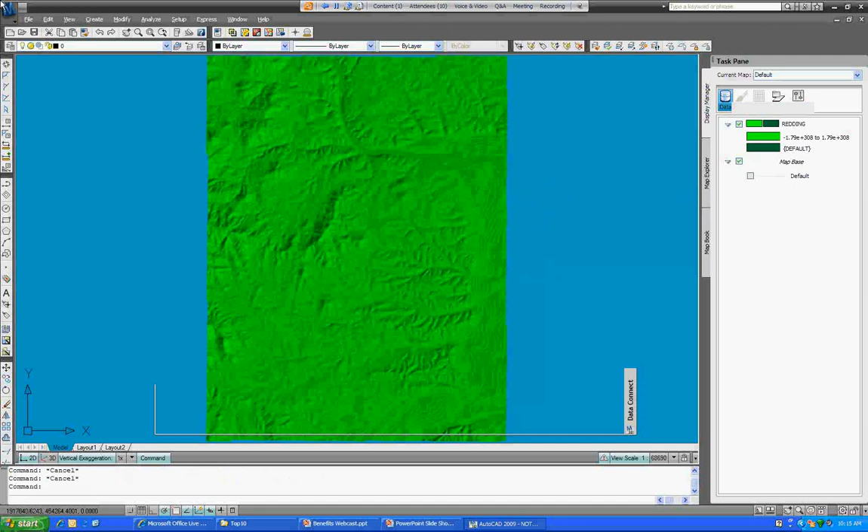Let's add a few more sources of data to this. So let's connect to another image, and in this case I want to connect to some MrSID images. So a meaningful name for my connection.

In this case I want to get a folder. I have a folder out there with some MrSID information in it. We'll connect to that, and we'll see the entire list of images in there for us. So here are the SID images.

So let's see, the coordinate system here is unknown. I happen to know the coordinate system for these, and again, if we want transformation to happen correctly, we need to apply coordinate systems. So I can globally edit the coordinate system for all of these, and let's set this coordinate system at the California State Plane coordinate system of our drawing. So again, knowing the code, I can just type it in and it will find that for me.

So it sets the coordinate system for those SID images, and then I can bring them into the drawing. As opposed to having all these images on their own layer in my display manager, I'd like to combine them to one layer, and I'll just give it a name of SID.

So it adds that data to the map. So there's my SID image, and I can zoom up on that, and we get a little better look at some of this data in the Redding, California area.

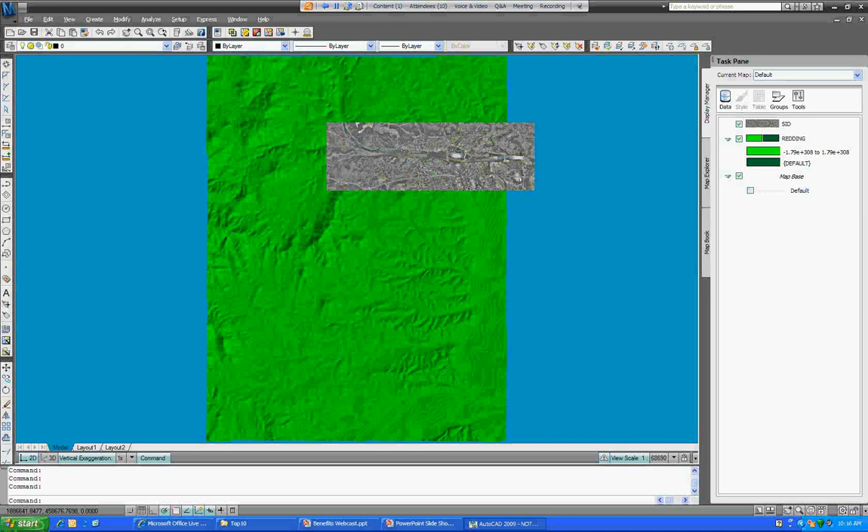One more source of data that we can bring in. I've got a digital raster graphic, yet another image source. So let's connect to that digital raster graphic.

And it's in TIFF format. Again, needing to set a coordinate system if one is not provided by the image. Some images have the coordinate system embedded in them. Others use a world file that accompanies them. And in some cases, they don't have a coordinate system at all, so you'll need to set that up.

In this case, we're looking for USA, California again, but it's the CA-TEAL, the Albers coordinate system. So we'll add that to the map.

So what have we done so far? We've set up a coordinate system for the drawing, and then we were able to consume data, images in this case, of varying formats and bring them together, and you'll notice they all line up correctly. They all come together correctly in this map. So map handles the coordinate system transformations for us. All we need to do is set the drawing up correctly.

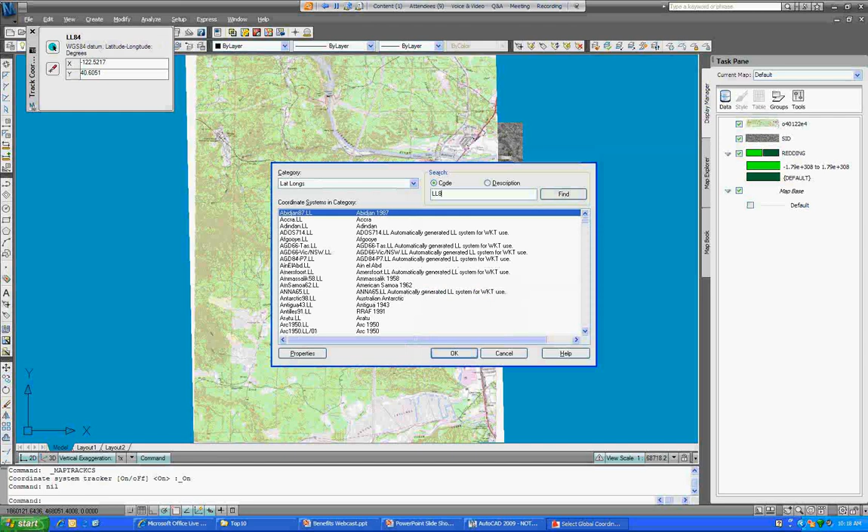Maybe I'm interested in, I don't know, not a UTM, maybe lat long. And what am I looking for? LL84. There it is. So now you'll notice I am getting an echo here of the lat long where my cursor is. Same position in the drawing, but I'm getting different XYs.

So I have the ability to track coordinate systems, any coordinate system that map supports, and there are a lot of them, in my map. So true real-world context in our designs.

So let's move on now and let's talk about the ability to access other types of data. We've seen the ability to access some images. Let me open a drawing here, and we'll close this drawing.

So this drawing is called LL84, and as you might expect, the coordinate system assigned to it is LL84, so this has been set up previously. And this is again something you can set up in your AutoCAD drawing template, so that if you work in a specific coordinate system all the time, then each time you create a new drawing you don't have to think about it, it's just set.

So let's bring in some SID files again to start with, and I'll browse to my folder. Again, I want to set the coordinate system for these, and I know globally I'm looking for, there it is, California, State Plane, North Zone.

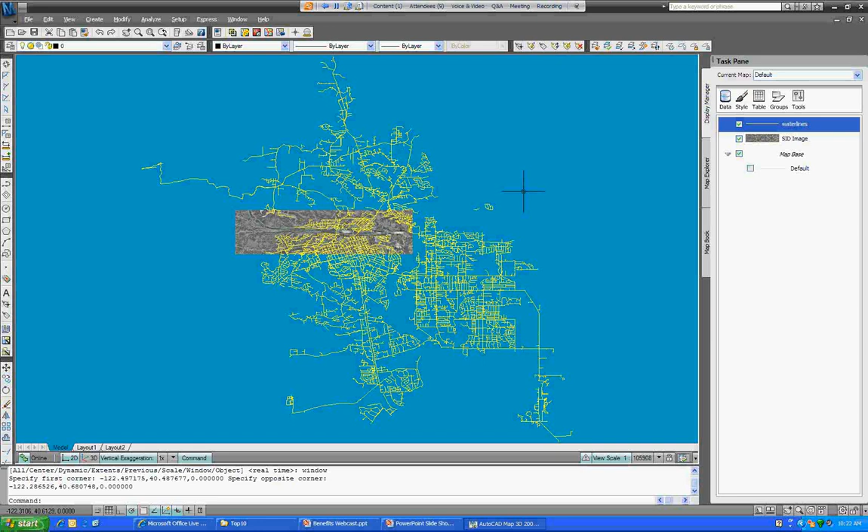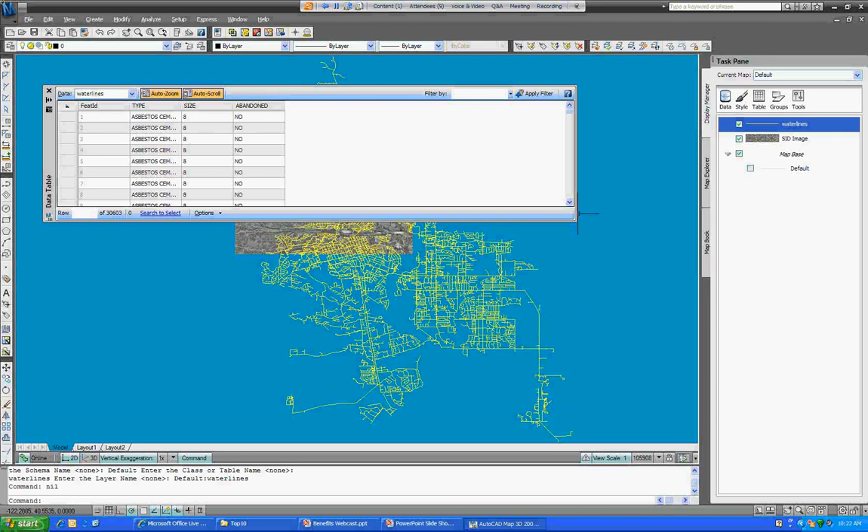We can access information about this shapefile through tabular information in a data table. So there is a data table associated with this, and for those of you familiar with ESRI shapefiles, you'll know that this information is held in a DBF file. So this is a direct look into the DBF file for this particular waterline shapefile. I'm trying to drag this out a little bigger.

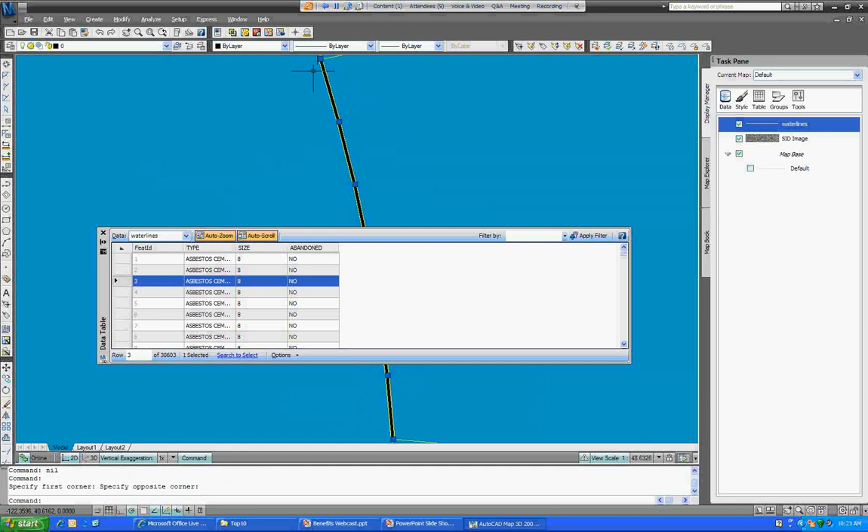At any rate, we have the ability not only to select information, waterlines in the drawing in this case, but we can also highlight a particular waterline in the data table and have it zoom to and be selected in the drawing. We can go the other way too: if we select in the drawing, we get that record highlighted in the data table.

Accessing this data is nice. It's very easy, very streamlined for those of you familiar with working with shapefiles in previous versions of MAP before FDO was as robust as it is.

You typically had to import that data. So you would take a shapefile, import it into MAP, and through that import you would get a translation of data from shape to DWG. In that translation, you have a couple problems there. You have the ability to introduce errors in that translation.

You also end up with multiple silos of data. You've got a shapefile that represents this information, and you now have DWG data that represents the same information, and keeping those in sync as data changes becomes very cumbersome. With the feature data object connection we see here, we connect directly to that shapefile, so there's no translation, no conversion of data. This is the shapefile that I'm looking at, rendered through Map3D.

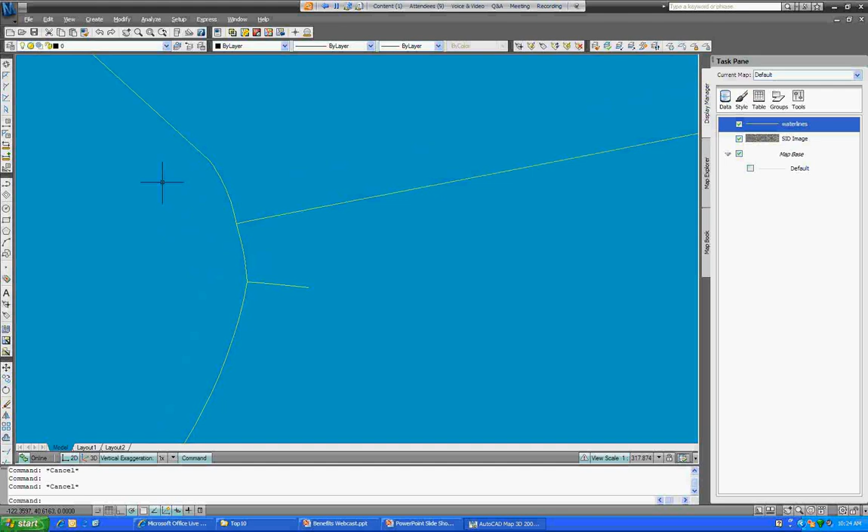If I want to edit this data, and yes, you can edit directly in that shapefile, what I do is check that feature out. It checks that particular segment I've selected out of that shapefile. That checkout process prevents other users from accessing it or making edits to it until I'm done, and then I can change it. Just a simple grip edit.

It may be something more sophisticated. Once I'm done, I check that feature back in. I've now updated that shapefile directly.

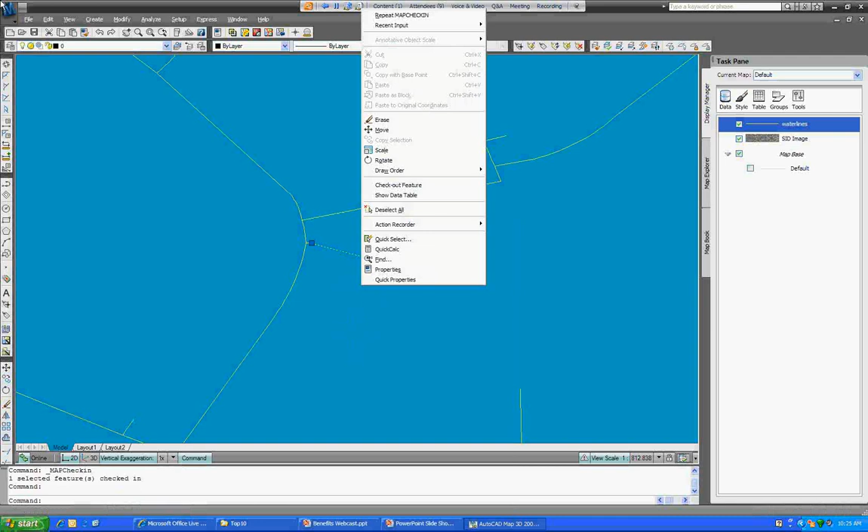If some things in the data table need to change, I can change those as well. Maybe that is not a 6-inch pipe, perhaps it's an 8-inch pipe. I can update that DBF file as well.

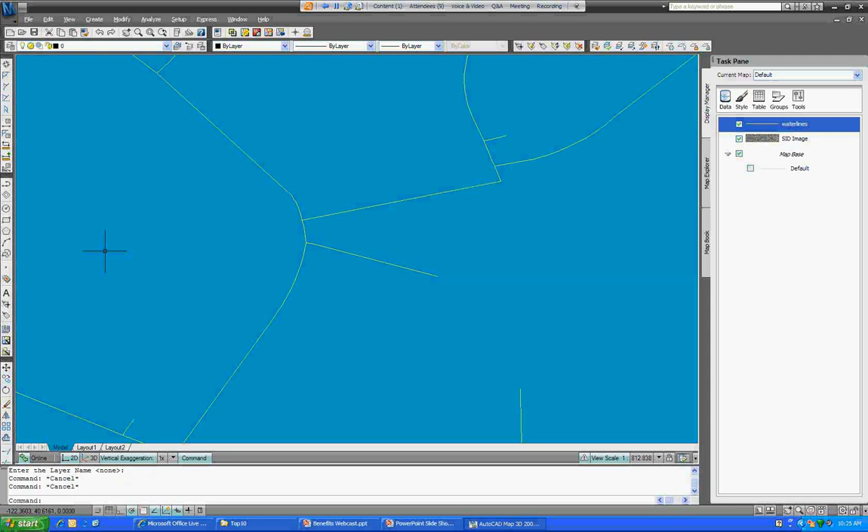So that's all well and good. We have the ability to directly access information through FDO. We have the ability to edit it. We also have the ability to create it.

Let's find another area here. Let's say I need to create a new water line in this shapefile for a subdivision that's going to happen. Maybe I already have it in DWG. In this case, I don't have any line work in DWG. But I can create or translate DWG information directly into this shapefile.

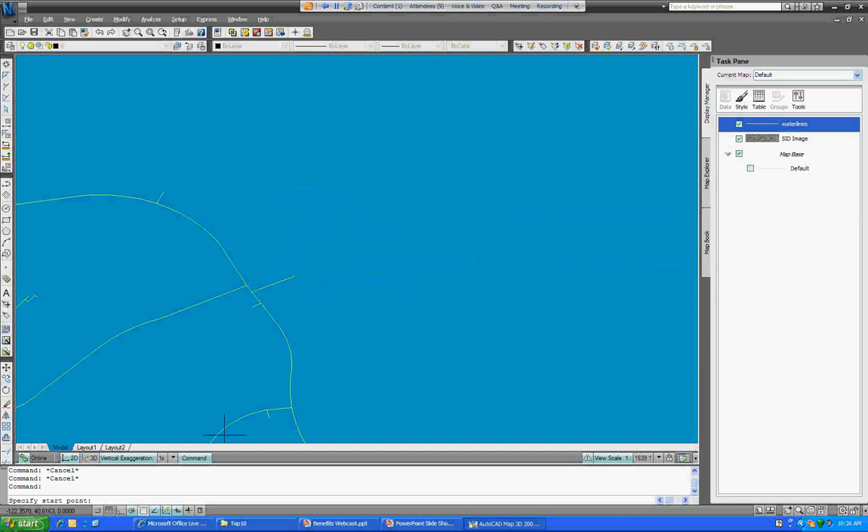In this case, let me just create here. I have the ability to create a new water line and turn on my OSNAPs. You'll notice I've got all my very familiar CAD editing and creation tools. I'm not doing anything out of the ordinary here. It's just like drawing a line.

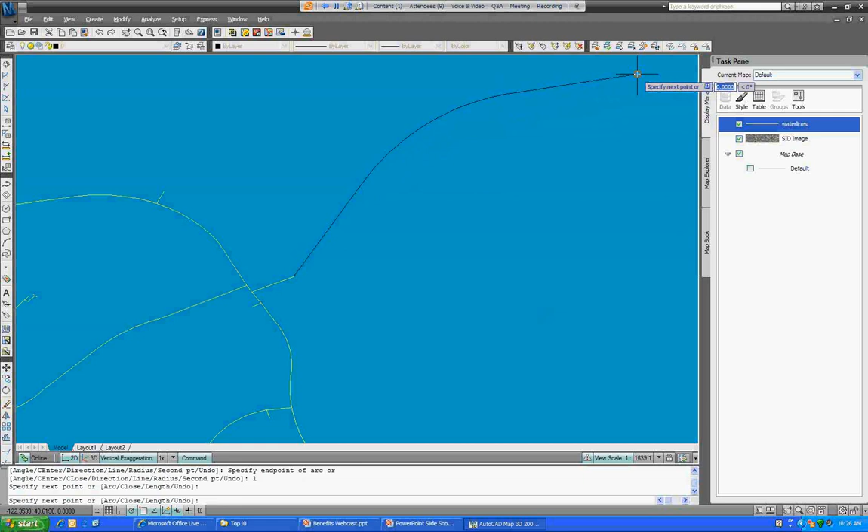I have the ability to put an arc on it, a curved water line that might not make sense, just demonstrating some of the tools. So I've created a new water line here. As I hit enter, it updates the shapefile.

It brings me to the data table and says, hey, there's some data that you need to fill in for this. So I can go about manipulating this data, sticking with some conventions here. 8-inch, what type of pipe here? Looks like PVC is a supported type. I can't update the feature ID, that's an auto-generated number.

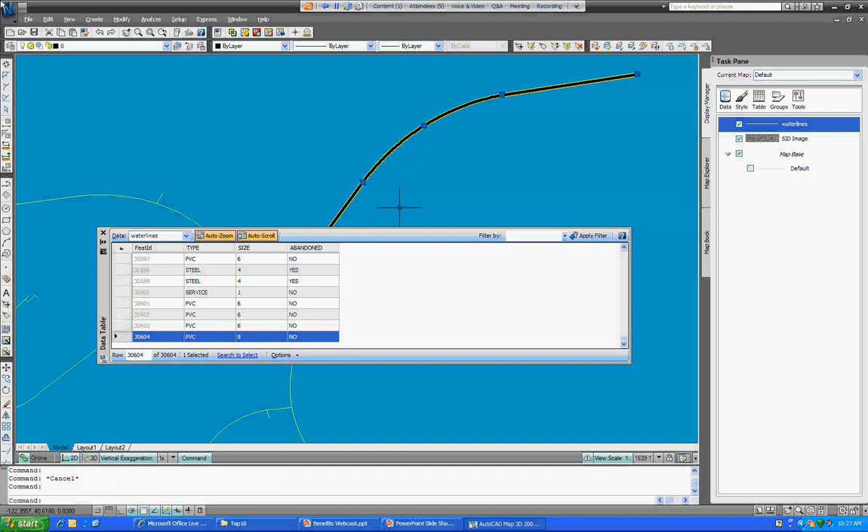This new feature ID will happen when I check this feature in. So as that feature gets checked in, it generates the feature ID automatically, and now I have updated that shapefile directly as well as the DBF associated with it.

Oops, did I just erase it? I think I did. Let me check all the features in here. There we go, so I just needed a refresh on that layer after I checked that data in.

So again, very easy to consume data from other formats, bringing lots of data together to a single map. What else does AutoCAD Map give us over just vanilla AutoCAD? It gives us the ability to have cleaner, more accurate drawings.

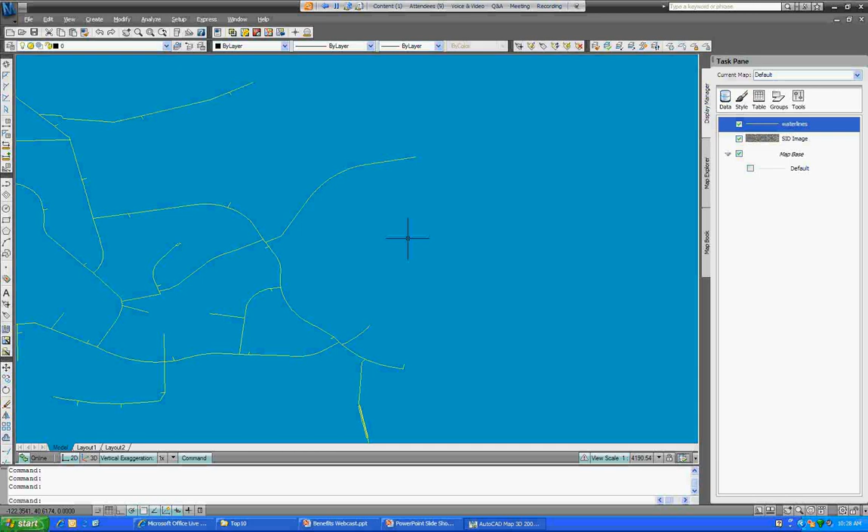So let me open yet another drawing here. In this particular drawing, we're going to use some drawing cleanup tools to clean up some of the errors that might get introduced into a drawing through general drafting or digitizing over a raster image, or maybe you've imported data from other sources. You have things like duplicate lines or duplicate entities on top of each other.

You might have little undershoots. Maybe somebody was drafting without their OSNAPs on, so you have little lines that look fine at this zoom scale, they print fine, but truly they're not connected. They're not snapped together like they should be.

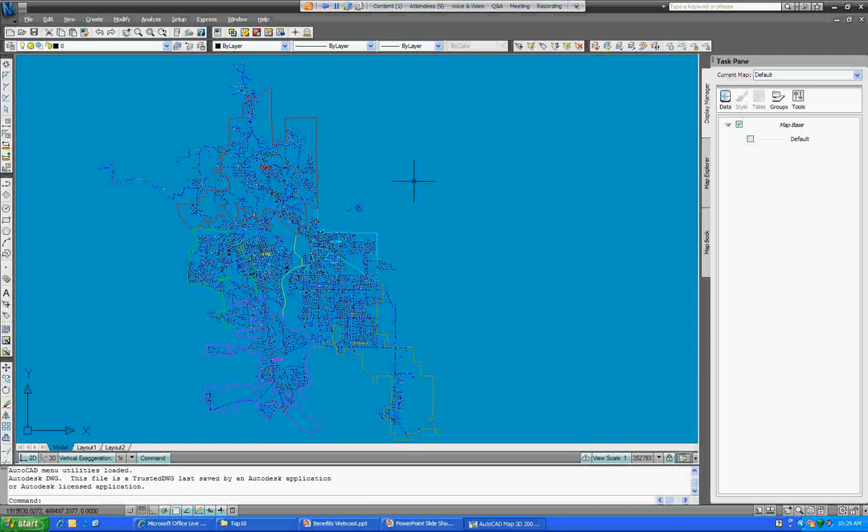Maybe you've got little overshoots that can be generated in the same manner. These things have typically been tolerated in the CAD world because they view okay. You can zoom up pretty close and not see any undershoots or overshoots. They print okay, so they've been accepted.

But when you come to the GIS world and you're doing analysis, maybe some kind of trace analysis, those little undershoots and overshoots can really mess up your analysis, as well as duplicates. If you've got 2 or 3 water lines drawn on top of each other, again, they print okay, they view okay, but when you do analysis, like how much 8-inch water line do I have in this area, that one line gets counted 3 times because you've actually got 3 lines on top of each other.

So an easy way to get rid of errors like that is using the drawing cleanup tools. Let's run some drawing cleanup on this particular drawing. The drawing cleanup is a wizard-based interface.

The first page of this wizard wants you to select what objects you want to clean up. In this case, I know I want to clean up the water lines layer. What cleanup actions? I want to delete duplicates.

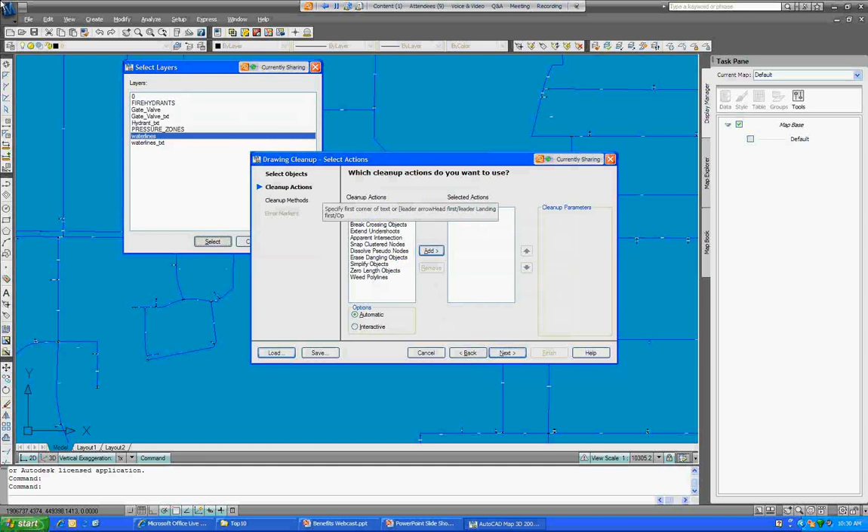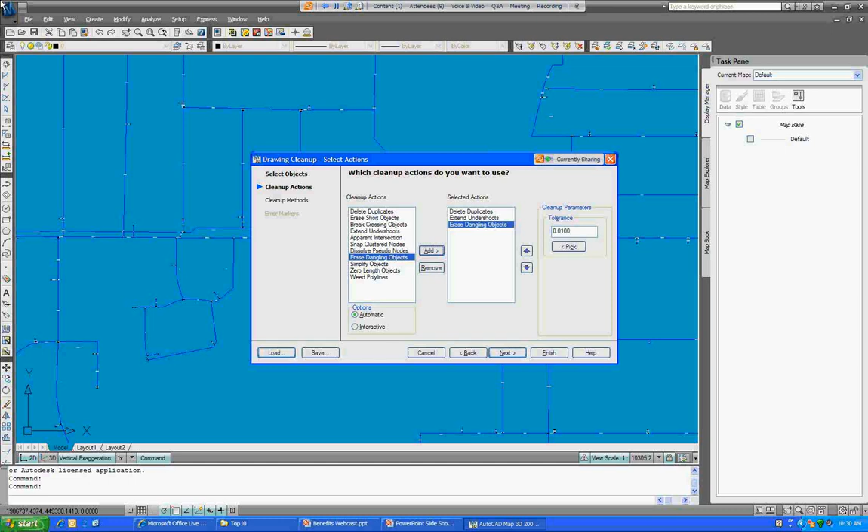Let's extend undershoots and erase small dangling objects. You'll notice that some of these things have a tolerance, so you can set a tolerance. What length does a line have to be, or an object have to be, to be considered a dangling object? How close to being snapped to another object does it need to be to be considered an undershoot? So those are options you can set up with the tolerances.

And let's make this interactive. We want to modify the original objects. There are some other options here. I won't delve too deeply into those.

Another nice thing about this drawing cleanup tool is the ability to convert line work to polylines. So let's say you get a drawing from an outside contractor and they've drawn all the water lines using lines. You like, in your organization, to have all the water lines be polylines. So you can convert all those lines to polylines.

You can convert arcs, 3D polylines. You can dumb them down to a 2D polyline, much lighter weight, circles, and finally arcs to polylines. So those are all things you can do with this cleanup wizard. You can use this cleanup tool to do just that without actually deleting duplicates or extending undershoots or anything like that. And finally you get your error markers.

So let's finish this. And it in fact found 33 duplicates. Can you imagine being a drafter or designer having to work your way through this drawing and finding those duplicate objects? It would be almost impossible.

Let's change the zoom scale here. So we zoom up close. And let's go take a look at the first duplicate object. Here we find a duplicate object, a line on top of a line.

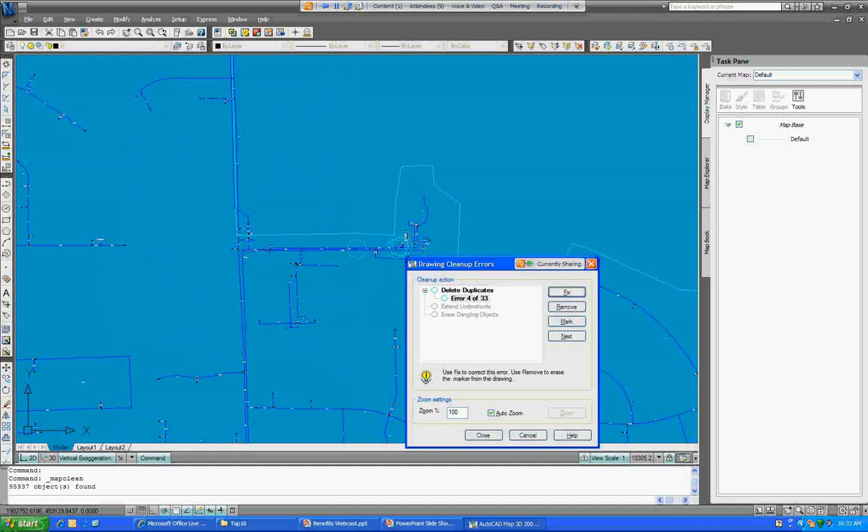And if you trust the software and you just want to get rid of all the duplicates in one fell swoop, you can highlight the upper level of that error and choose Fix All. So all my duplicates have been fixed.

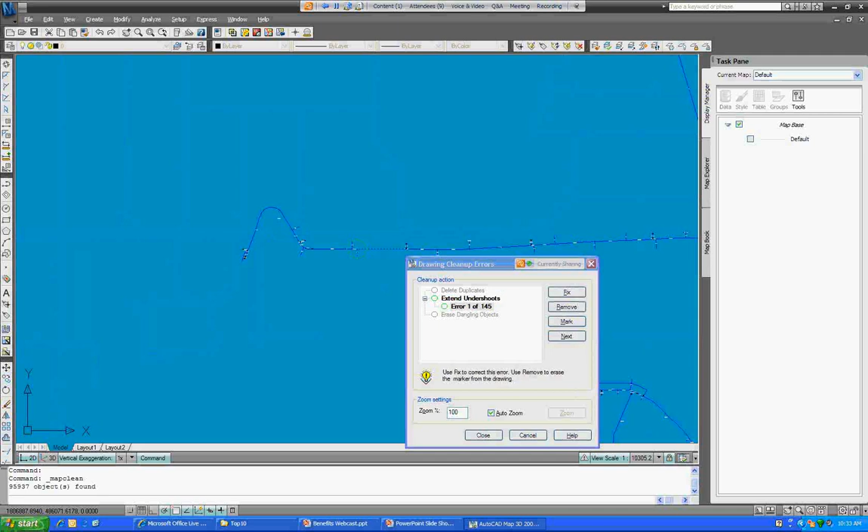Now I've got some undershoots. I've got 145 undershoots. Again, we can work our way through those. Scroll up, very hard to see with just the naked eye that there's an undershoot there. I could fix that one, fix that one, fix that one.

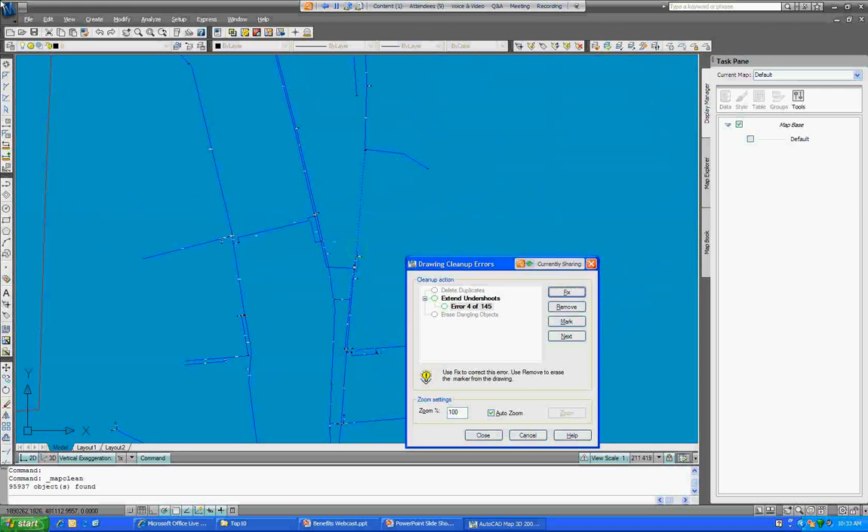And again, if I just want to extend all the undershoots, if I want to fix them all and let the software do its thing, I can. Dangling objects, got 6 dangling objects.

And let's say you're not sure about one of these. So you zoom up on this dangling object and you say, that looks like a water line stub to me. That doesn't look like a true dangling object. What am I going to do?

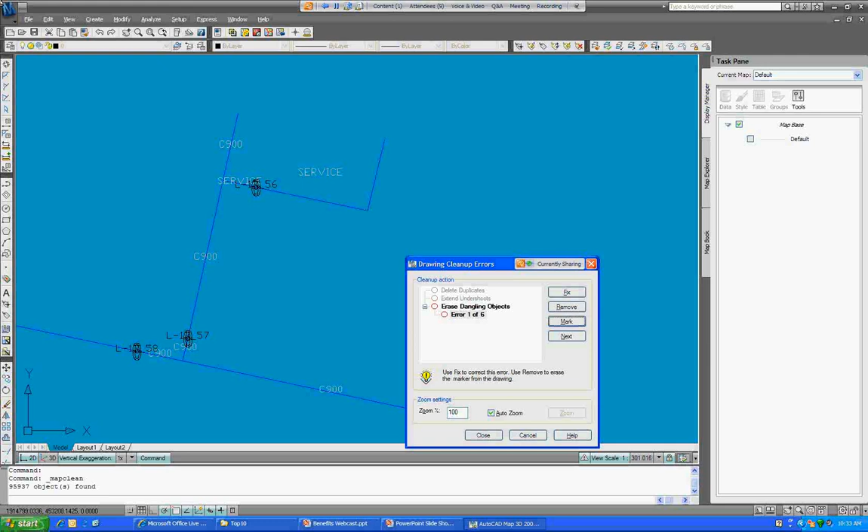Well, I need to talk to somebody about that. So I'm going to mark that one. It just puts a marker on that for me in the drawing. And then I can move on to the next one. Number 2, that doesn't look like a dangling object, so I'm not going to fix that. I'm just going to remove that from the list. Number 3, I'll remove that. So you see how you can work interactively with this drawing cleanup wizard.

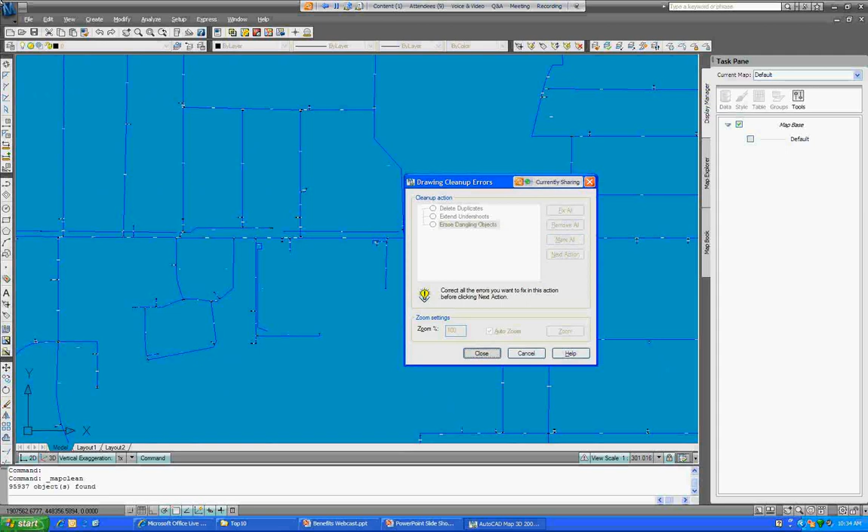And I'll just fix the rest of those and close out of this. So I've taken a drawing that had potentially many errors and cleaned it up very quickly. I was a little bit speedy and probably not as thorough as you might be in a real world environment.

The next thing we want to talk about is building in some consistency to your data standards when working with Map 3D. That consistency in the DWG environment can come through object classification.

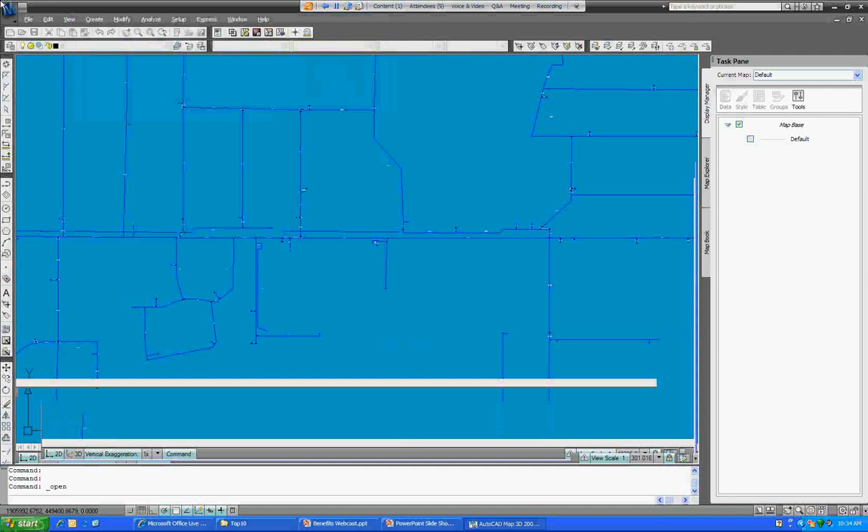So let me open yet another drawing here. Classification drawing. In this case, what we're looking at is perhaps a drawing that we've received from an outside contractor. We've got polylines that represent the parcels. If I select one of these, let's take a quick look at the properties. It's just a polyline, it's closed, it's on a new project parcels layer, but this doesn't quite meet the standards or isn't in step with the standards that I've got in my environment.

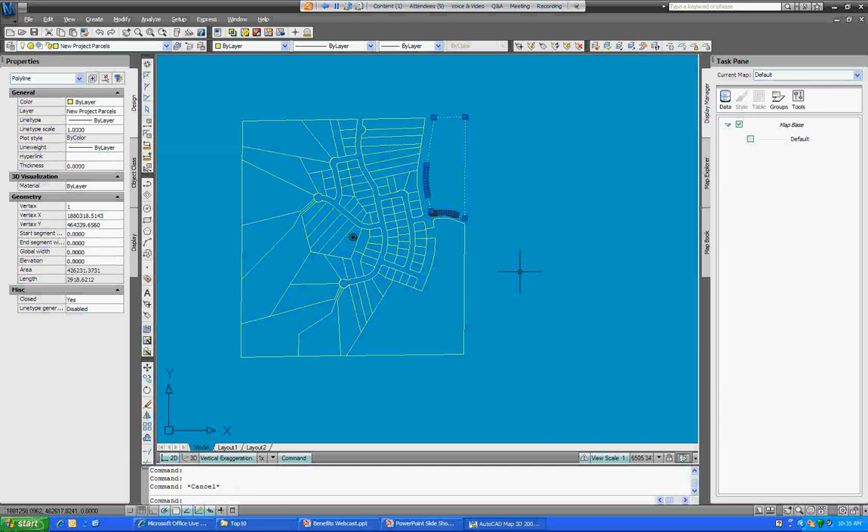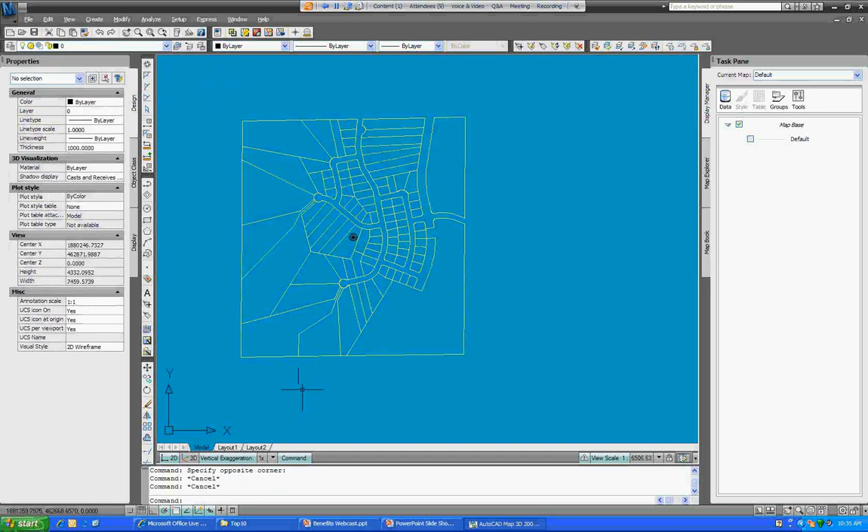So what you can do is build object classifications that will enforce standards on a drawing like this. Let me check my layer status here really quick. Yes, here we go, parcels. I like my parcels to be on a layer called parcels, not new project parcels. And true, I could easily select all these and change them to a new layer. But I'm going to let my object classification handle that for me, because object classification is going to do a little bit more for me.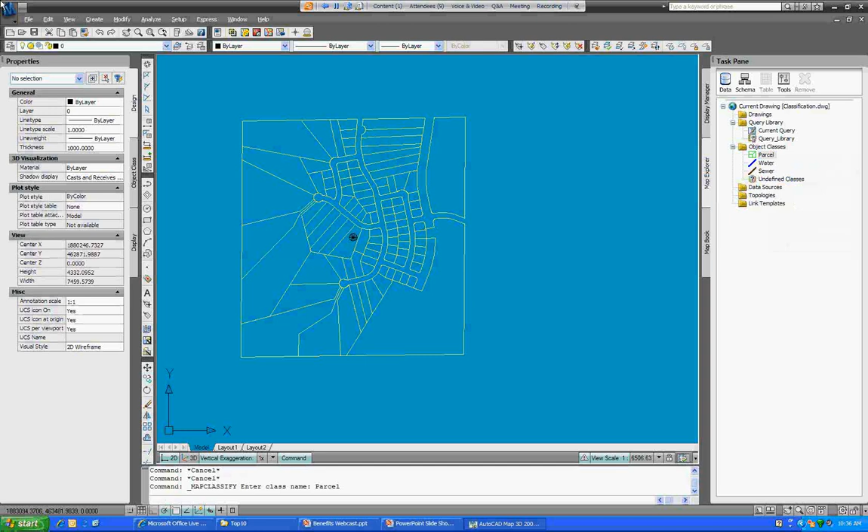You can see that I've built a classification already called parcels. Let's use it once, and then we'll take a look under the hood of this object classification. So I want to classify some objects, in this case parcels. I'm going to include objects with out of range properties, and exclude objects that are already classified as something else.

So let's just grab all my parcels as what I want to classify, and you'll notice that they changed color. They changed color because they changed layer. Now you'll notice that my polylines, my parcel lines, are now on the correct layer in my environment. What else do they have?

They also have some real world data tied to them. Those of you that work in the AutoCAD environment, AutoCAD is great at drawing a parcel. AutoCAD is not so great at classifying or letting others know that that closed polyline represents a parcel. How would you specify that? You might put a label on it or some text next to it that says this is a parcel, this is the area. But when you start to use AutoCAD Map to define these parcels, you have the ability to use object data tables.

That's what's been applied here, an object data table called parcels. In that object data table, think of it as a database table where the user can define what attributes go into it and what types of data those attributes can be. In this case, we've got acres, address, APN. Again, things that a regular AutoCAD user might not easily be able to specify on a particular polyline, without using a label or something visible in the drawing. With Map, you can use an object data table, so it holds this information behind the scenes and is only accessible when you want to use it.

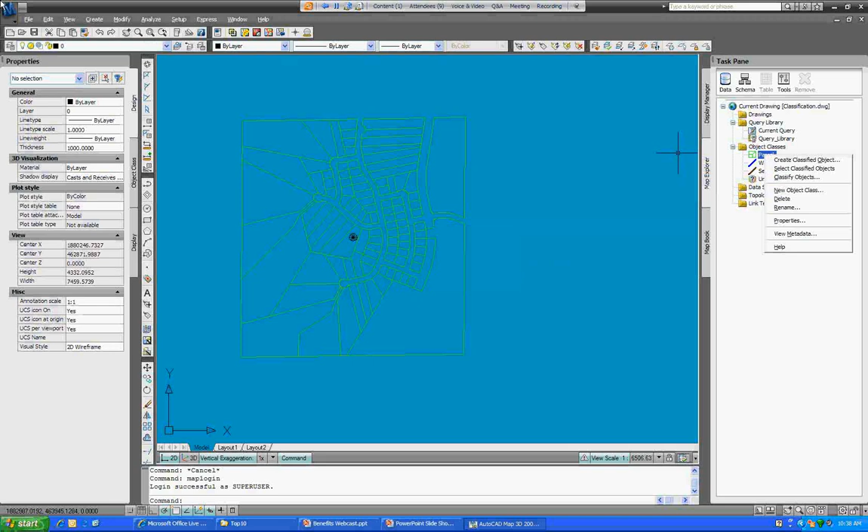So let me log into Map here. That's one of the idiosyncrasies of Map - there's actually a login that gives you some more privileges, and one of those privileges is the ability to look at the properties of an object classification. So here's the object classification definition. It applies to all ACDB curves, so that's lines, polylines, arcs, circles.

The property list forces a layer. So this is why I got that layer change - it forces a parcels layer on those objects. And here's the object data table and the attributes that are applied when something gets classified as a parcel in my case. So fairly powerful and fairly useful for those wanting to apply some standards to parcels.

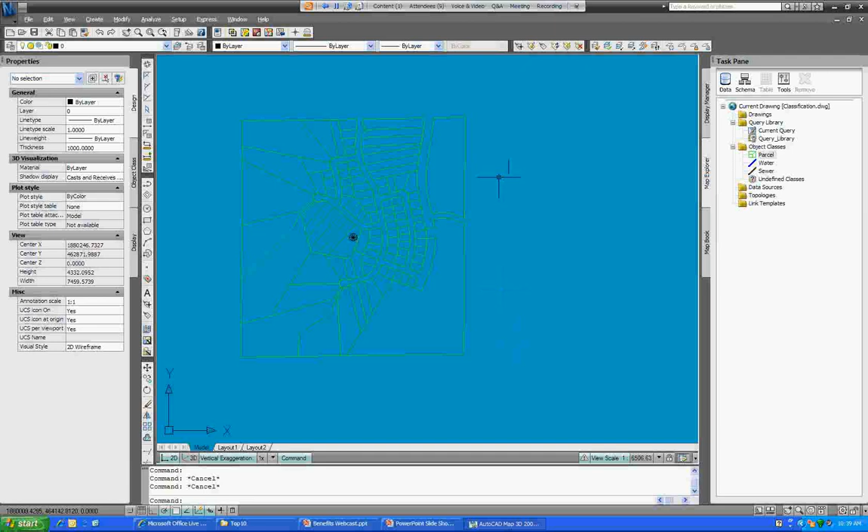So let's see this happen again with water lines. Let me switch up my layer state here.

Some of these are turned off or frozen, so let me turn on my water lines and turn off my parcels for the moment. Here's a set of water lines, and if I grab one of these, you'll notice it's on a layer called New Project Water Lines. It's a polyline with no attribute data tied to it, but all that's built into my classification.

So I want to classify some existing objects, in this case water lines. You'll notice that they all turn blue, because they've been changed to a new layer, enforced by my classification standard, and now I've got some real world data I can apply to this. So the size, the type, whether or not it's abandoned — these are all editable right here.

So maybe it's a 12-inch, maybe it's not PVC, maybe it's steel, or so on and so forth. All that data is now held in object data tables in Map that I can access for things like analysis, creating labels, and general user information. So a very powerful tool, this object data, and the ability to build object classifications tied in with it.

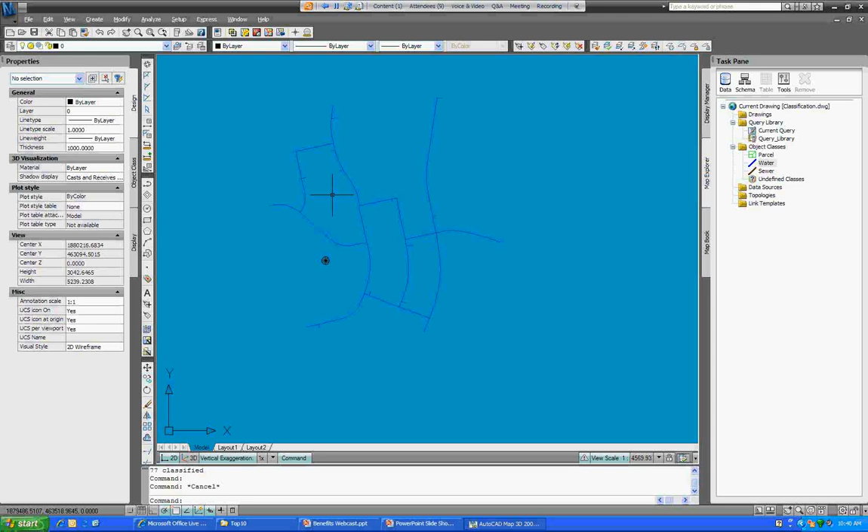What if I want to create a new water line? What if I need to extend one of these? For instance, I might need to extend this one down here. It's as easy now as creating a classified object.

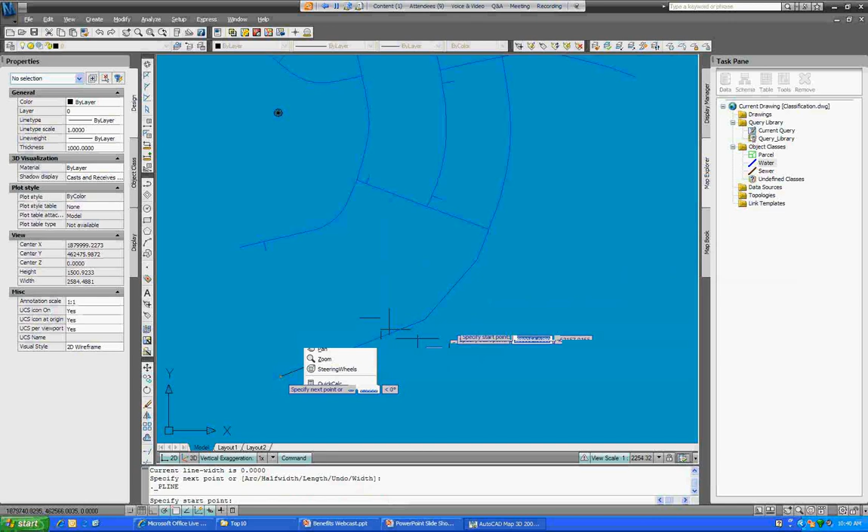And that object has been created on the correct layer, even though that layer wasn't current. It's got the object data tied to it, and it's got any other properties that I enforce already applied. So again, a very easy way to create standards and apply those standards not only to existing data, but to new data that you create. I encourage you to explore that — object classification is very powerful.

The next topic, let's talk about the ability to work with data in formats other than DWG. I apologize, I tried to get Oracle Spatial running this morning. I just switched to a new computer and I'm having some hiccups here and there that I didn't have time to flesh out this morning.

So I'm going to do this next demo in an SDF environment, but we'll pretend that it was Oracle, and if it were Oracle it would be a very similar process, so I'll try to point out those differences. Let me open yet another drawing here.

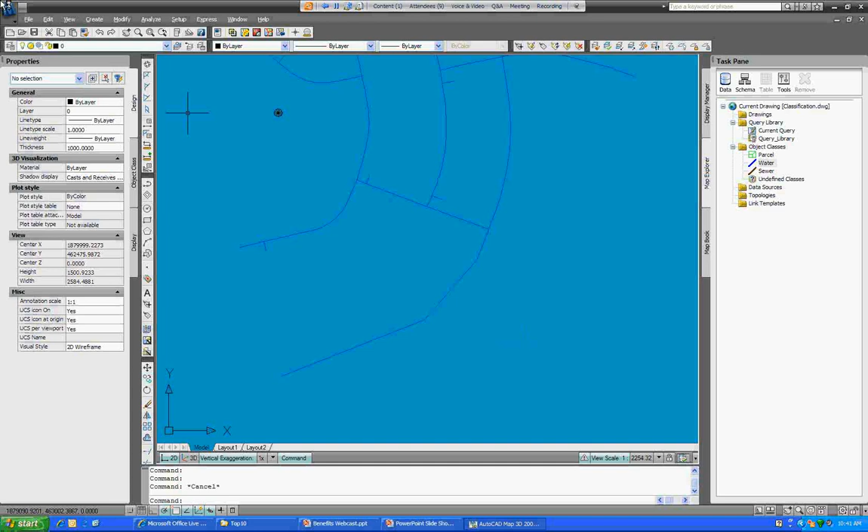This drawing is called the database drawing, simply because I planned on connecting to a database with it. I already mentioned I couldn't get Oracle Spatial up and running, but I do have a MrSID image applied to this. I want to show you how easy it is not only to connect to a database — and again, we're faking it a little — but also to create new schemas in that database, new repositories for data I want to add to it and consume from it. So as opposed to connecting directly to an Oracle database, I'm just going to build an SDF schema.

Let's call this 'test,' and this is going to be for the water lines. I can apply a coordinate system — I'll just go with the one it defaults to, the one the drawing is set to, and that will work in this case. So it throws up my schema editor right now, and it's just got a blank schema.

It assumes you're going to build on this, and I can build new feature classes into it — maybe I want to add a sewer feature class, a parcel feature class. Again, we could be working directly in a database here; in this case we're working in an SDF file. But I've already built the schema, so let's import that schema and see what it consists of. I built this schema just to save a little time, since we're about 45 minutes into the presentation and have a bit longer to go. So I'm going to bring this schema in.

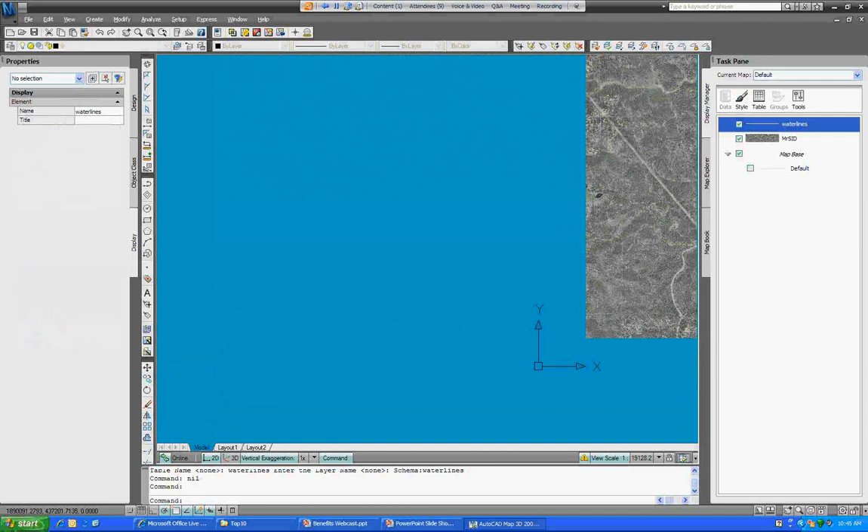So let's create a new waterline line string. Let's move off to the side here. So there's that new waterline line string. Again, I'm working directly in this database, this SDF database.

Is it abandoned? Again, these are fields that I built into it. No, it's not abandoned. What's the size? Here's the drop-down list I just built, so users can select from the list what type. Maybe it's PVC. Again, my SDF number is auto-generated, so I don't get to specify that.

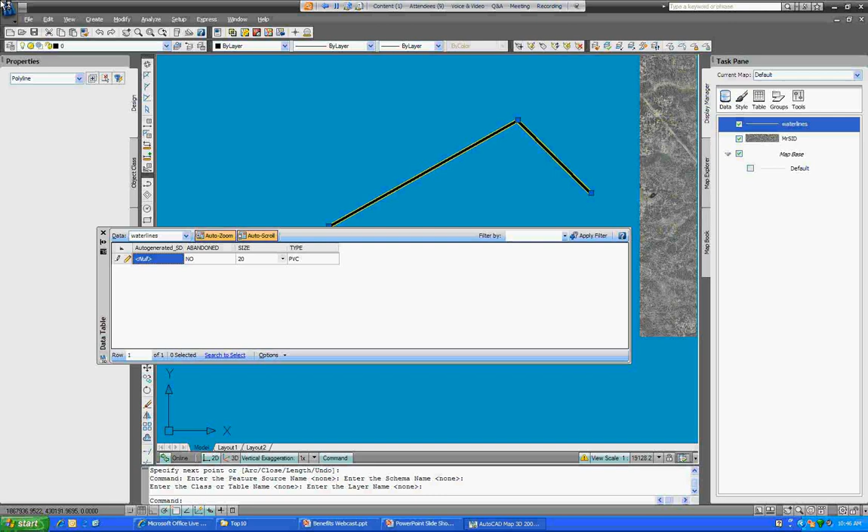It happens when I check that feature in. So that's the first feature in this particular database. And so I begin to populate this database with information. So again, very easy to build these schemas, these data repositories, for you to start to add your own data to.

The next topic, let's talk about the ability to generate 3D graphics. We mentioned this earlier in the presentation during the PowerPoint section. You can bring in three-dimensional surfaces like digital elevation models and drape other data over the top of it to get a very nice 3D rendered look and feel.

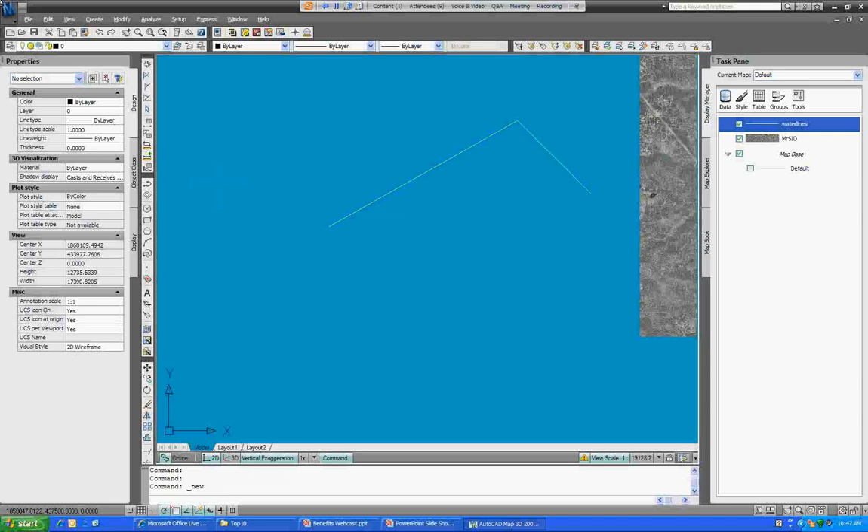So again, moving on to a new drawing. I'll just start a new one in this case. Map 2D drawing template is fine. And I'm going to connect to a couple sources of data.

So as I mentioned to start with, we need a three-dimensional surface, a three-dimensional raster surface. And I've got that here in my Reading DEM. No, I'm sorry, I want to use my Duncans Mills Northeast DEM. So I'll connect to that. It sees the coordinate system, I'll add it to my map. So there we see it.

Connect to one more source of data, again another raster, and in this case the raster is a TIFF for the same area. The coordinate system is applied most likely through a TIFF world file, for those of you familiar with georeferencing TIFFs. So there we see the TIFF laid over the top of the digital elevation model.

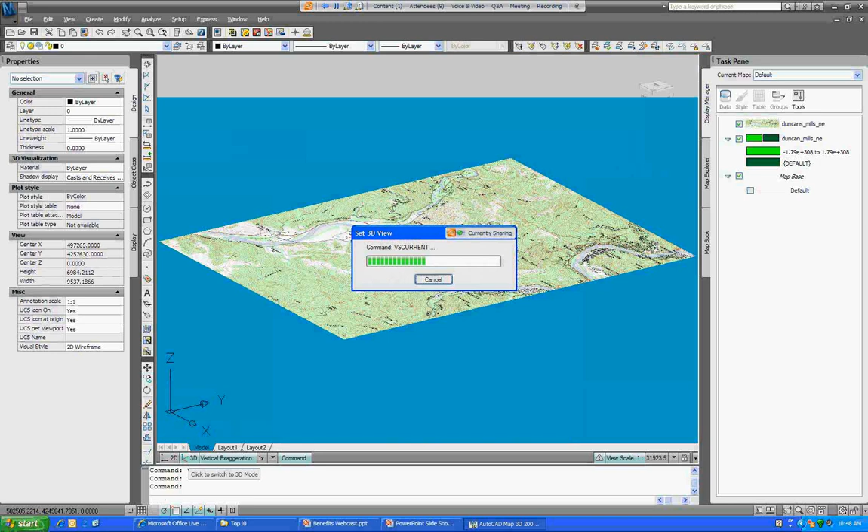We can now switch to a 3D mode, and we'll see that TIFF actually drape over the digital elevation model. So we'll give it a minute here to render itself, and there we go. So now we can zoom up, we can pan around, and we get a very nice three-dimensional look.

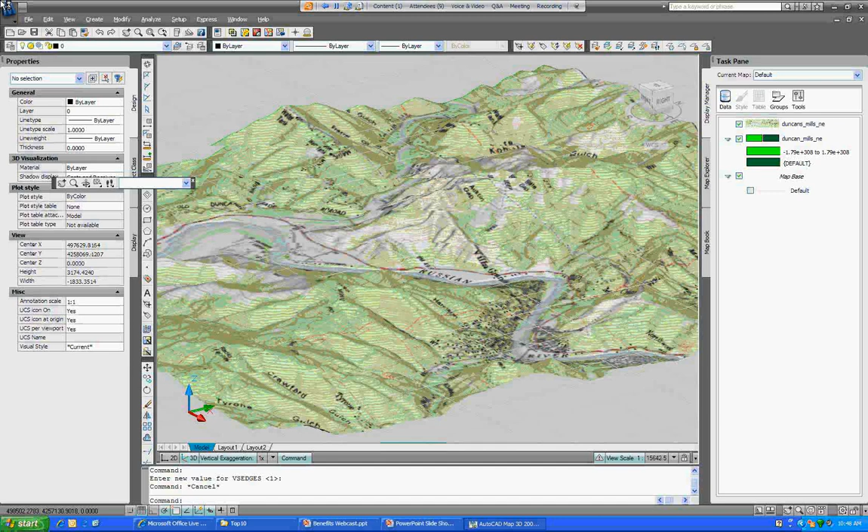And this new orbit tool is new in 2009, so you can just quickly pick different views and have it zoom and pan to that view. So a very nice tool, very easy to create a three-dimensional look and feel using a digital elevation model in this case, but any kind of raster graphic will work - Esri grids, other raster surfaces that are out there.

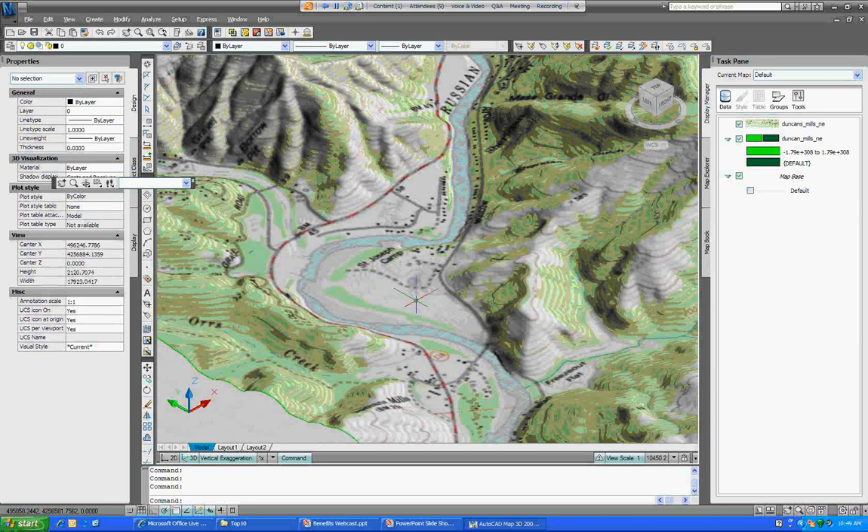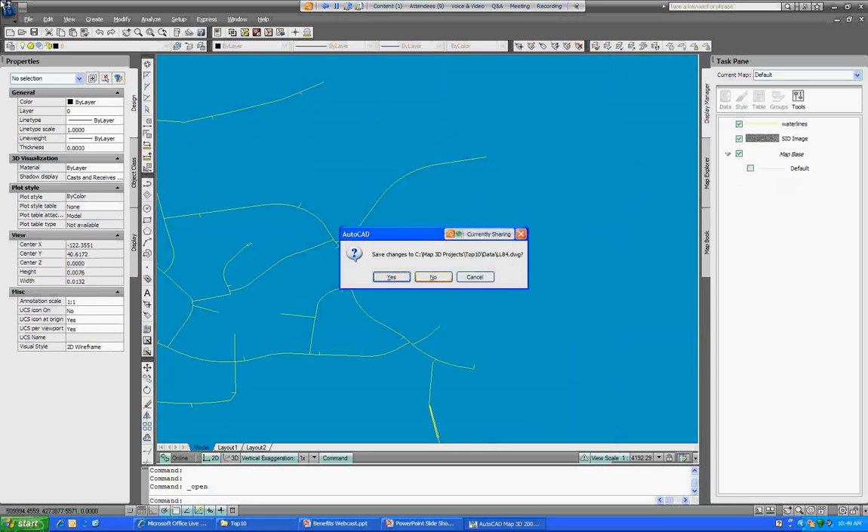Jump back to a 2D mode. And I'm going to, let me close all the drawings I've got open here. Not worried about saving changes to these. And I'm going to next show you the ability to work in a true multi-user environment with a single drawing. So let's get all these drawings closed, and let me open a drawing called Session 1 and Session 2.

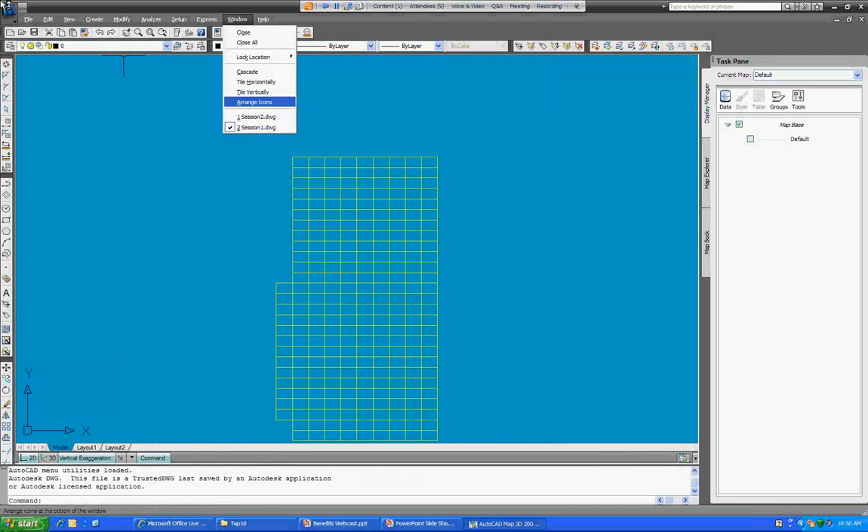Let's tile these vertically so we get a look, and you'll notice that the two drawings look very similar to each other, and both have the same drawing attached. This is through MAP. This is the way you work in a true multi-user environment with the same drawing.

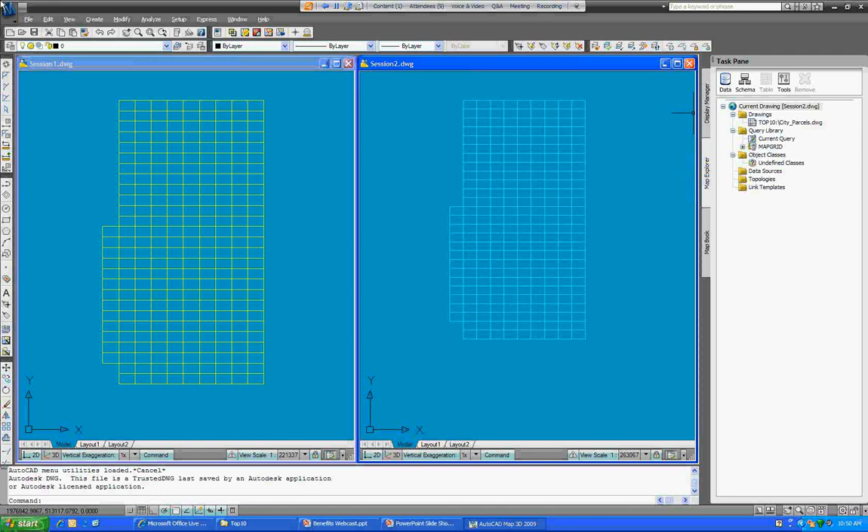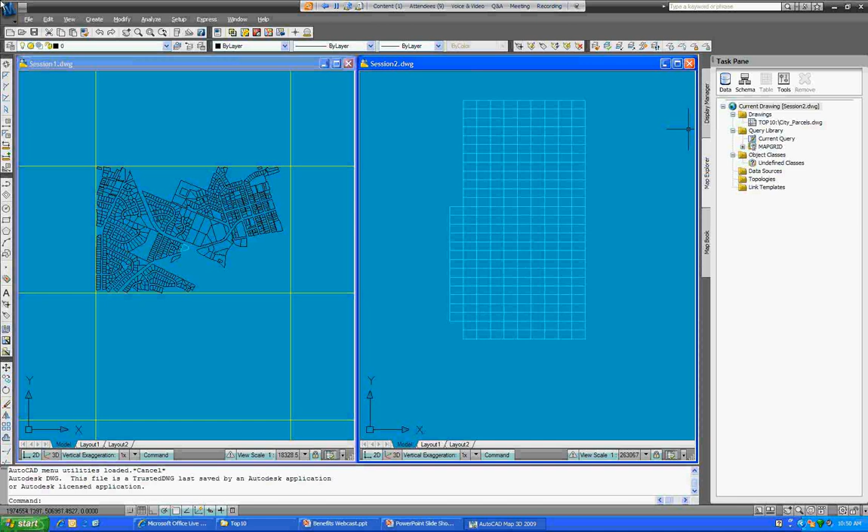You'll notice Session 2 is connected to the city parcels drawing, and Session 1 is connected to that same city parcels drawing. Let me execute a query, which is basically a request for information from that drawing. Here's the grid that it populated. Over in Session 2, I can execute that same query on the same drawing. So what we're looking at is essentially the same information from this city parcels drawing in two different sessions, two different users. So now you have the ability to work with this data at the object level.

For instance, if I want to make a change as Session 2 to this particular parcel, maybe a simple grip edit, I'm prompted right away to add this data to the save set. I can say yes.

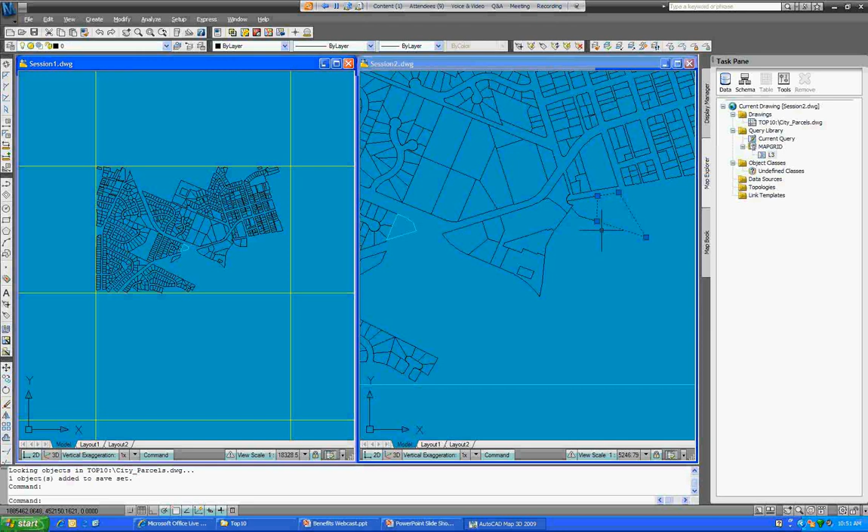So this object is now locked for other users accessing the same data. If I come over as Session 1 and try to make a change to that, as soon as I try to add that object to my save set, I get a warning. I can't add that to the save set. It's locked by another MAP user, in this case me, so that object can't be changed by that user and can't be added to the save set.

That save set is the intermediary between the drawing we're looking at here, this data we queried, and the city parcels drawing. So how do I, as Session 1, get access to the update from Session 2? Session 2 needs to clear his save set by saving it back to the source drawing. I'll go ahead and do that.

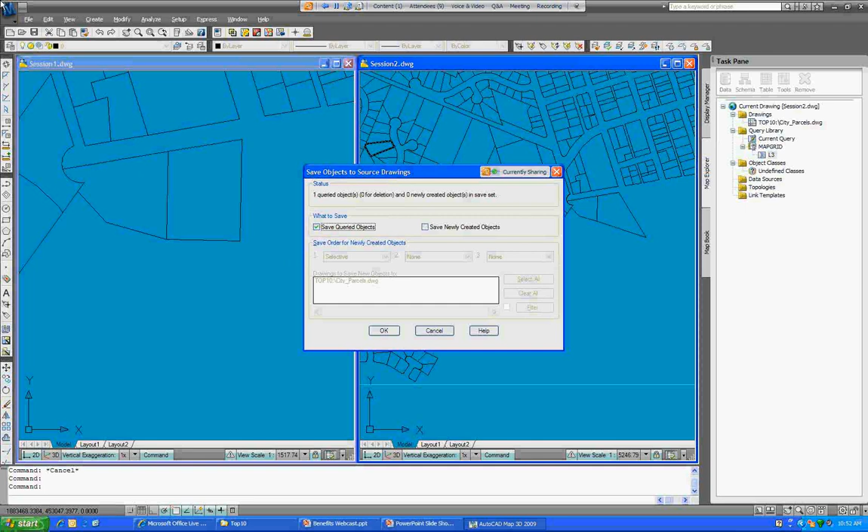I've got one queried object right here. It tells me I've got one object in my save set. I'll go ahead and push that back, and you'll notice it disappears from here.

So I can re-execute this query and see that change. That change is now permanent, pushed back to city parcels.

So I can come over here as Session 1, knowing a change has been made, and re-execute my query. And I see the update that Session 2 made. Again, this is working in a true multi-user environment, locking drawing objects at the object level, not the drawing level. Typically with AutoCAD, when one user opens a drawing, it's read-only for everybody else, but with MAP you now have the ability to work in a true multi-user environment.

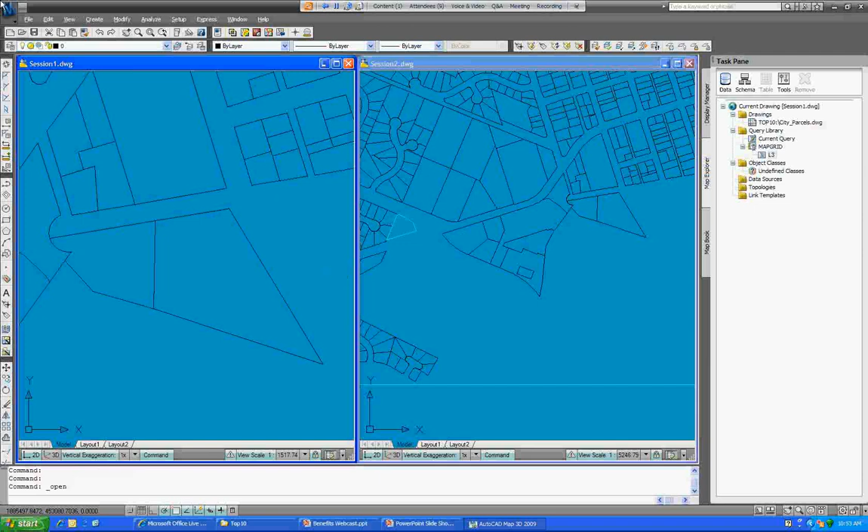I talked a little bit about the ability to work with and edit metadata, so let me jump into another drawing here where we've applied some metadata. Different menu sets have things in different places, but here's my metadata editor. Let's take a quick look at the metadata applied to this particular drawing.

We've got several sources that we can stylize this in different ways. I'll go with the classic. Here we see the basics, the summary of this. Let's edit, and we can edit this data.

So there's lots going on here in the metadata editor, and this works not only with DWGs but with shapefiles, SDF files, any file-based format that supports metadata. You can work with it here. Right now I'm in the FGDC standard; there's also an ISO standard you can apply, with many different tabs of different information.

So you can apply and edit metadata to drawings or other file-based information as you work with it. I won't save any changes because I didn't make any. So there's the metadata editor, and I'm speeding things up a bit because I want to leave time for questions.

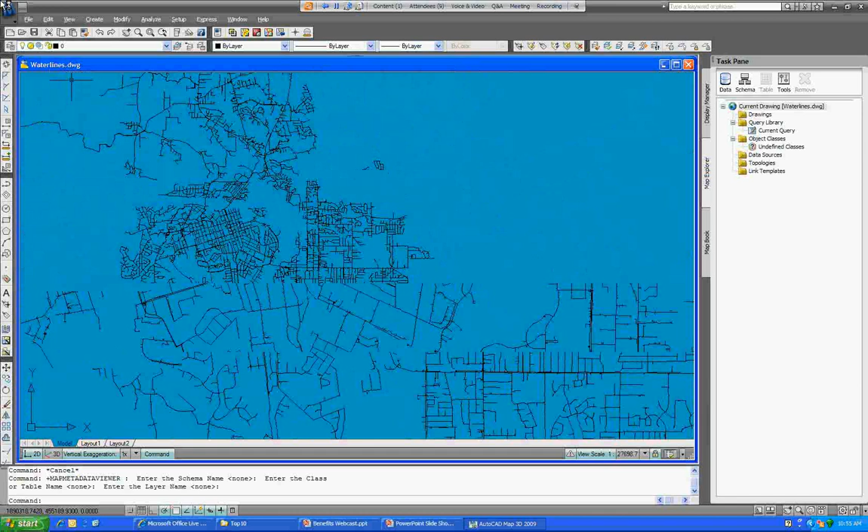Finally, let me open one more drawing and show you the ability to publish easily from Map 3D. I did plan on publishing to Map Guide, but we're running out of time, so I'll publish to DWF instead.

I'll open up the phone lines, and hopefully we've got some questions. We can talk a little bit about what Map Guide looks like.

For those who haven't seen it, Map Guide is the web publishing tool from Autodesk. It allows you to publish maps very easily from Map. It's a one-click publish to Map Guide—just need to be on the right tab. I won't do it again in the interest of time, but you can publish exactly what you see here out to a Map Guide site, and in literally minutes have an internet site you can point users to so they can access this data through the web. Very cool.

But let's talk about DWF, and publishing options in DWF. When I publish to DWF, the design web format, I can publish any map, any geospatial information. In this particular drawing, I've got a few shape files attached that have lots of meaningful attribute information, so I can put that into the DWF as well.

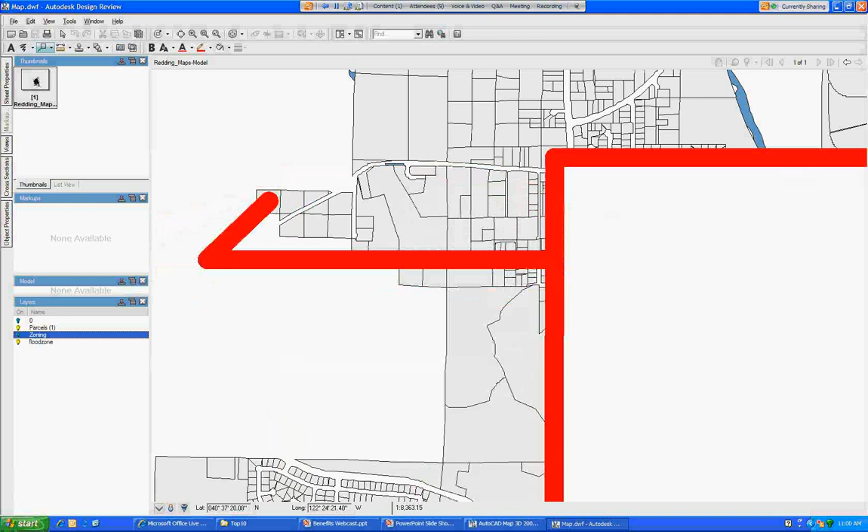And as I mentioned, we also have the ability to do markups. So let's build a rectangle callout, and let's make it a pretty good size. Let me escape out of that and zoom out a little bit. It's a little bit weird because it's zoom scale dependent.

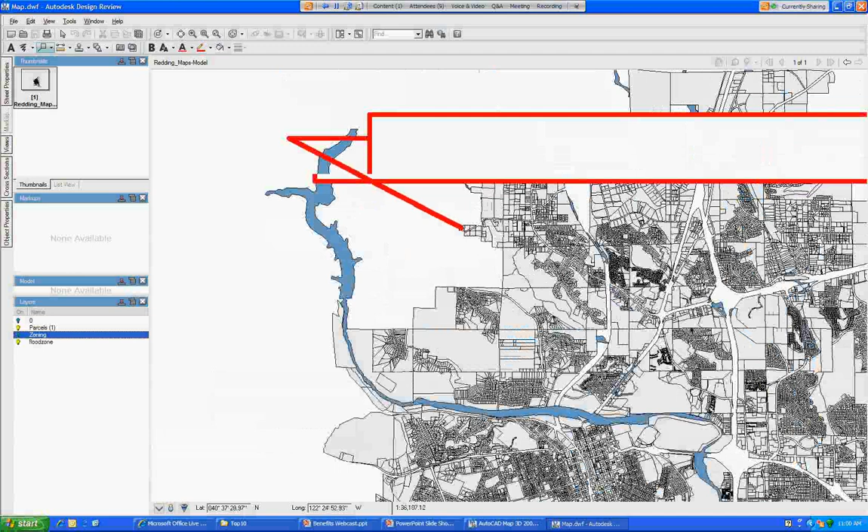So this is going to be very big. So maybe this is my markup. So we've put that markup in place now in our DWF. I can save this markup, and it obviously could have been a much more meaningful markup, and there could have been many of them. Save this.

I'll close it. And now back in my map environment where I created that DWF, I can bring that markup in using my markup manager. So let's just quickly bring that markup in, and I'll show you the several ways to respond to that markup, and then I'll open the line for questions.

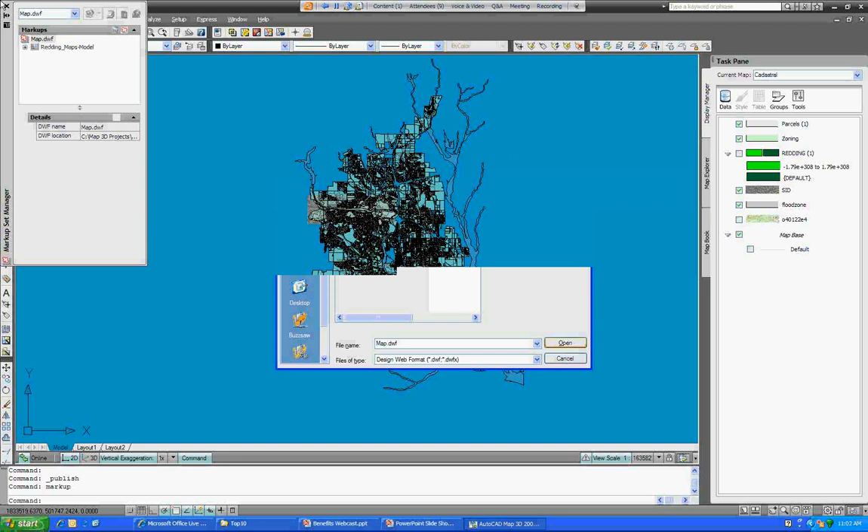So here we go, there's our markup. Let's see it in the design. There we go. So there's the markup now in my AutoCAD Map environment, and I have the ability to, maybe it was back, I need to send it back for review, maybe it was an update, I can say okay, this is done. I can now save this, republish the DWF, hand it back to the person that marked it up, and they'll see my changes, my responses.

I can also add some notes. Yes, this is huge, or what have you. So very easy to go back and forth in a paperless environment and get that red line markup.

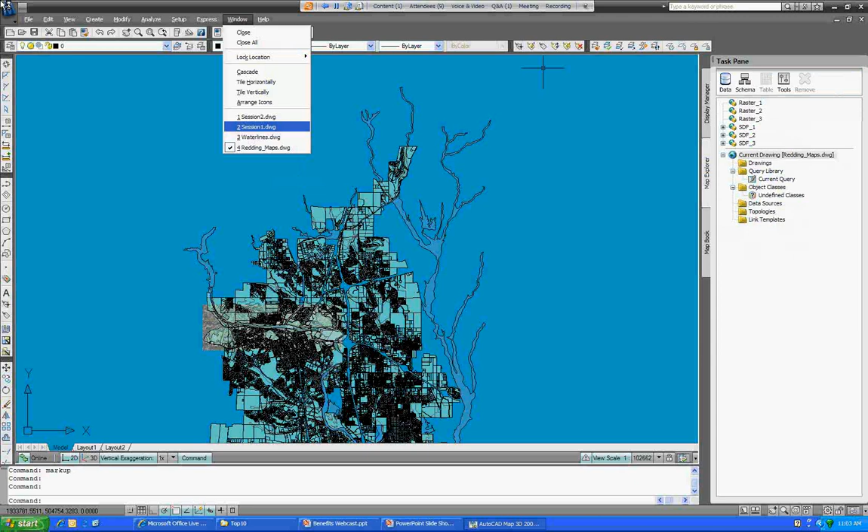Absolutely. I don't think I have that drawing open anymore. But yes, that object classification is built as an XML file in the background, so you as the CAD administrator can build that object classification file with your parcels, water lines, sewers, and then move that XML file out to a network location and have users come here and attach that definition file where it sits, and then they'll have that list of definitions that you've built.

What you can do is set that up in a drawing template, so if you create a new drawing, it's looking for that XML file. But if you get a drawing from an outside contractor, the first time you open it, you'll need to attach that definition file, but it will remain attached each time it's opened after that.

As you build these classifications, it builds the file in the background for you. So, you know, I've got one that I've built here for another client. Let me just attach it real quick.

Oops, not in there. Oh, let's see. There we go. So here's the XML file that I built. It just is out there as an XML file. It's an object classification file. So as I attach that, there's all the object classes that I've built in that particular file, in this case based on electric utilities stuff.